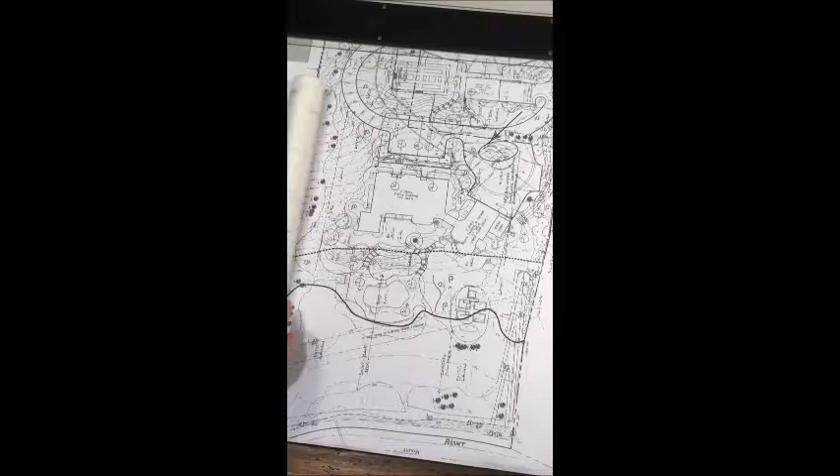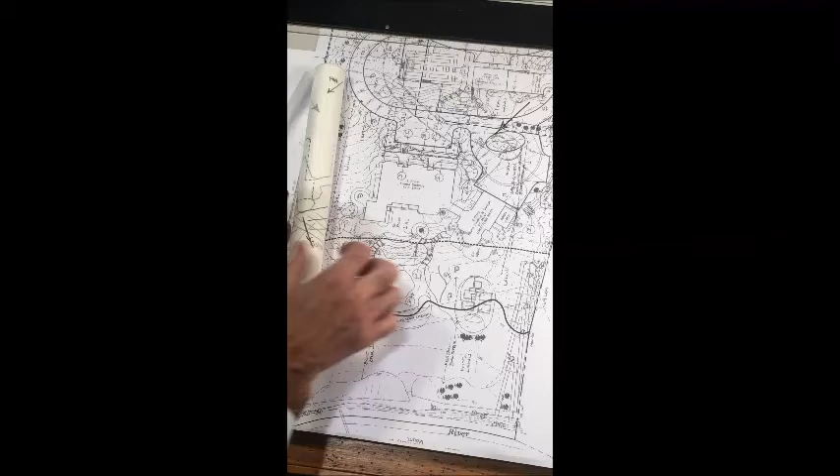This is a property just outside of New York City, and it's a little bit complicated because there's an extra house, a barn, a piece of house that we're removing, and a piece of house that we're keeping.

So here we have a house on a hill. The views are this way. We look at the setbacks, we look at the sun angles, in this case from here, morning sun, PM sun, and we look at things like the approach.

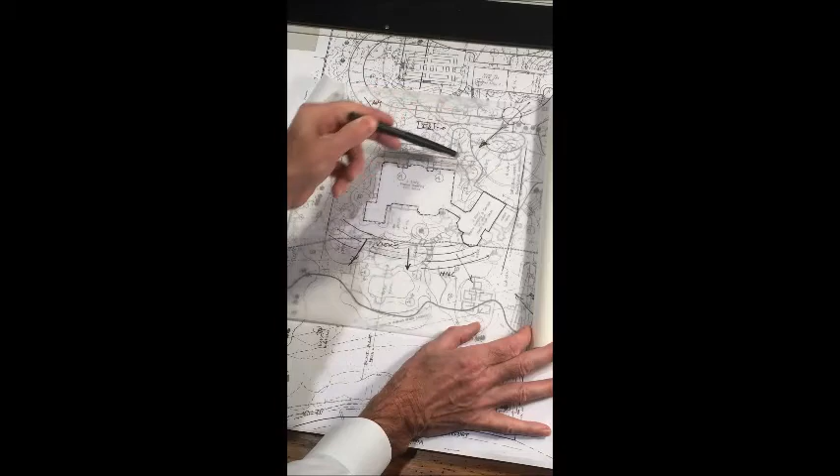Here, I like the approach because it passes by the front door as we move on to the garage. We're going to add some garage in this area so it'll work off the same courtyard as the existing garage.

We're on a hill, so I'm going to try and get some ways into the basement that the hill affords us. That way we can get some good quality space in the basement.

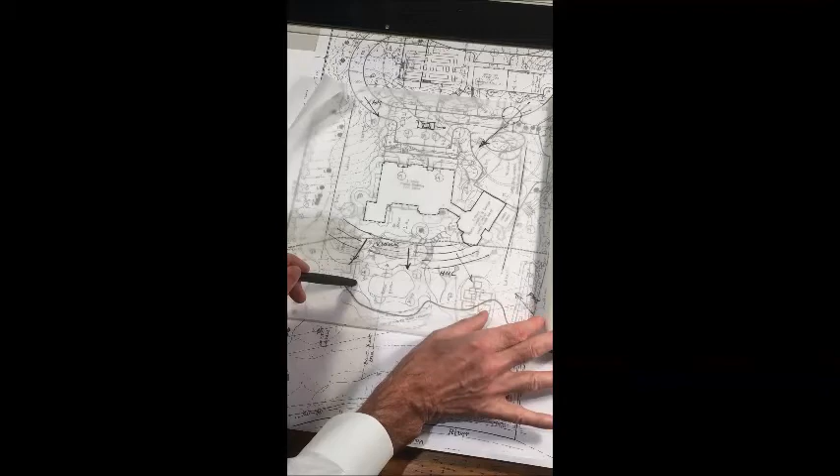Now I work at this very small scale. This is 1 inch equals 20, because if I work at this scale right on the site, I can keep all these site elements in mind. Now we're going to start the sketch, and we'll get into that in the next clip.

Alright, we're back again with the very first sketches for a new house being attached to the existing cottage. I start with a bubble diagram like this.

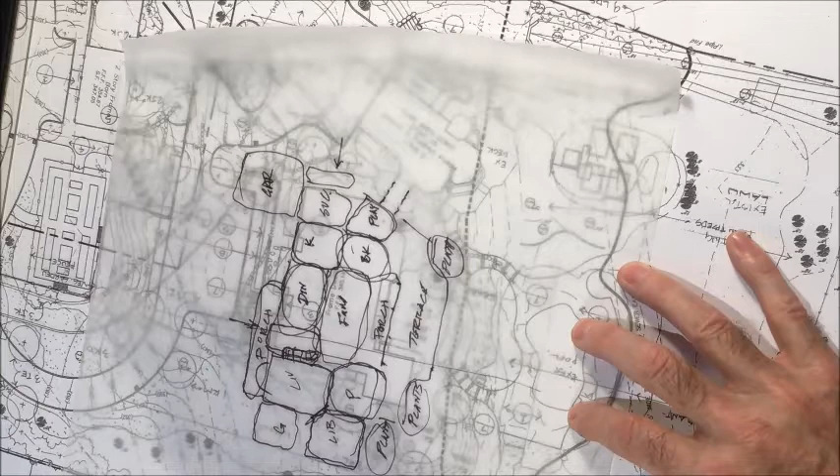I look at how we're going to enter the house, what we're going to see when we come through, what the room arrangements will be, how will we get in from the existing garage, and how will we get in from the new garage. So I just make this bubble diagram to show one option for laying things out.

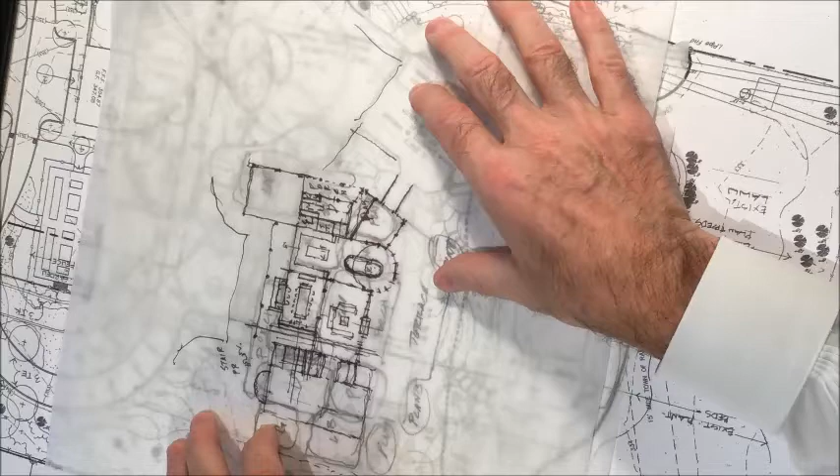I think about the terraces and where plantings might be as well. On top of that, I'll just lay another piece and start refining the sketch a little bit. So those bubbles will turn into little rectangles.

On this side, we've got sort of the family side of the house, which is kitchen, breakfast, family room, and then dining. And then our service side of the house with a side entrance and garages. This is a playroom, and this is the formal side of the house.

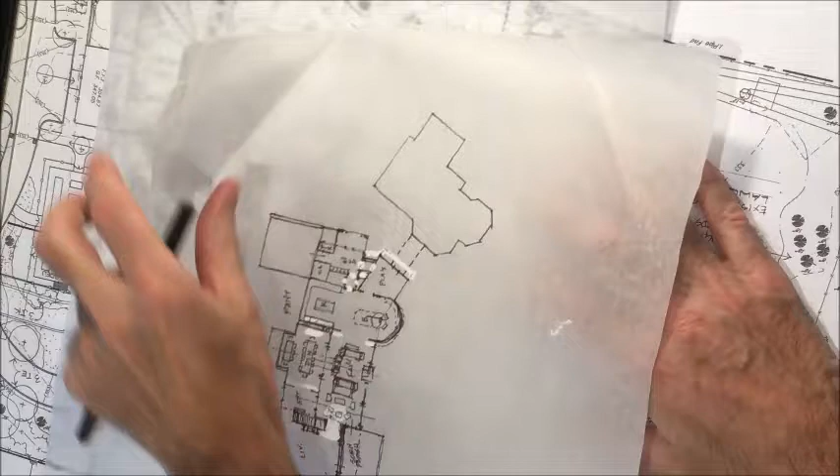The process just gets refined as I keep laying trace on top of others. When it gets too far to see through, I take some off and I just keep going. This is one of the first schemes, and then I'll get to the next scheme in one second.